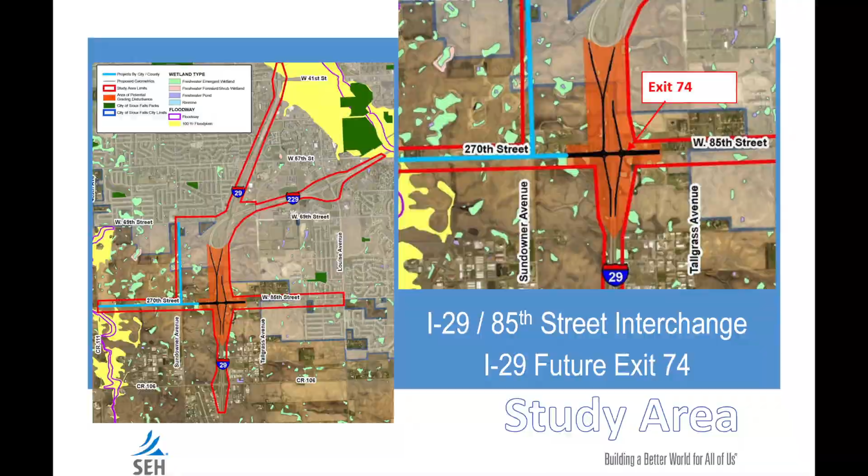So just a little bit of an overview here of where the project is. Some of you probably were here for meetings for the overpass at the same location, but the project limits are on I-29 from 41st Street on the north to County Road 106 on the south, and then along 229 it extends just east of the Western Avenue interchange. And then on 85th Street it extends from County Road 111, or the Tea Ellis Road, on the west, to Louise Avenue on the east. This information is also at some of the boards in the back, so I know you probably can't see some of this up here.

Here's kind of a timeline for the project. The overpass study started back in 2009. That was completed, and that was actually approved in March of last year. And so what we're working on is a study for an interchange at the same location. Once the overpass environmental study was approved, we submitted our justification report for a new interchange here to Federal Highway last year, and that was given a tentative approval in October, which allowed us to start on the environmental study for this project.

So once the environmental is complete and has approval, then we'll have approval for the interchange. So that's kind of where we're at today. We started work on the environmental study here in January of this year. And I'll let Ross jump in and talk a little bit about the environmental study.

Thanks, Al. We have 3 major pieces of our scope of services and work to perform on the project. I'll just briefly highlight what they include and what their current status is. The first 2 are survey and environmental studies. The survey work is largely complete. There's a lot of terminology on the slide that is a little bit technical, but the bottom line is we have to have all of the survey work completed before we can begin any kind of engineering design work. So we are very close to having the existing conditions base map completed. We expect that to be done very soon. All of that data then transfers to the engineers so they can start actually doing the design work.

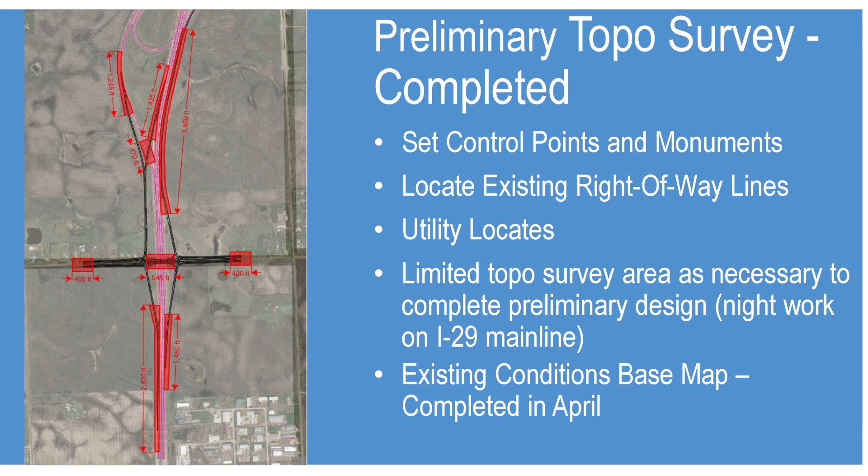What you're seeing in the background is what we call concept design. So functionally it works, it all makes sense, but you can't build anything from that. It's just to give you an idea of what it would look like before we take it to the next step.

So that's survey. For the environmental studies, the work in progress includes agency and tribal coordination. Agencies are federal and state agencies that have jurisdictional authority over things such as wetlands, threatened and endangered species, regulated materials, those types of things. What we do is we ask them, based on the study area, what's out there? Is there anything that we need to be aware of before we even get started? Because it does affect how we lay out alternatives. Same way with the tribes.

There may be tribal resources, so we need to know up front what's going on. So we're in the process of collecting all of that information back. We are also working on what we call special studies and field work right now. We got started on a few of these last fall before the weather turned, so we were able to get wetland delineation work done. And the rest of these are works in progress as we speak, especially the field work, which we really honestly haven't been able to get started until just recently.

So wetlands, regulated materials, we'll be doing another noise analysis of the area, and cultural resources. This is where we would look for architectural and archaeological historical resources that may need to be protected.

The third major task is preliminary engineering and design. What this entails is taking some of those conceptual drawings that were done previously, things that you see behind you, and making them actually into engineering drawings, engineering documents. The terminology we use includes horizontal alignment, vertical alignment, typical sections. Engineers basically will put a huge plan set together, and that's what will be a product of the work here.

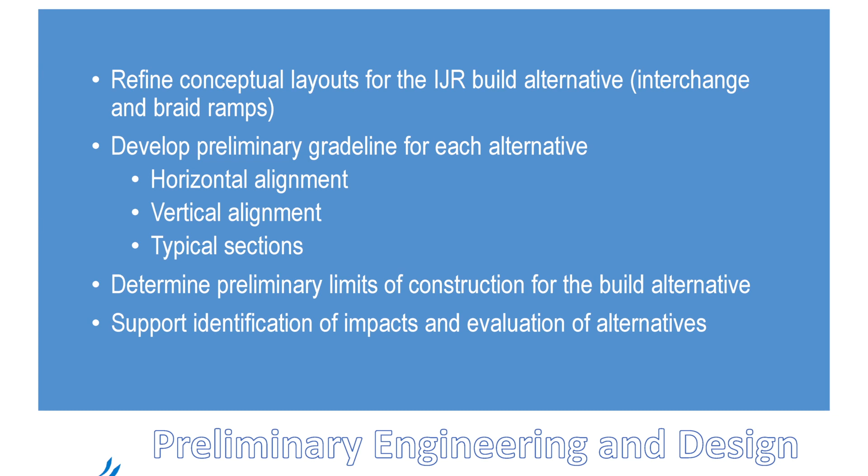So I mentioned input on the draft purpose and need statement. I wanted to spend just a minute to tell you why it's such an important thing in the NEPA documentation process. I've got just a couple of bullet points to read here, and these are not our words. These are from the Federal Highway Administration. We have representatives here representing Federal Highways, but these are the things that they are looking for as we put this together, and we'll talk in just a minute about what we came up with for purpose and need.

It validates the balance between the need for a project and social and natural environment impacts that might result. It establishes that this project is warranting consideration when you think about all of the other needs and all the other highway roadwork projects in South Dakota. It drives the process for alternatives consideration, in-depth analysis, and ultimate selection of the preferred alternative.

And there are several alternatives that will be considered for the project. And it is vital to meeting the requirements of other federal laws and executive orders protecting the natural and human environments. And we'll talk about that a little bit more too.

So this is what we have. We have three points for our purpose and need. This is very much a working draft. As a matter of fact, we were just tidying it up today, spending some time on it. But we'd love to hear from you, hear what you think about these points as we move forward.

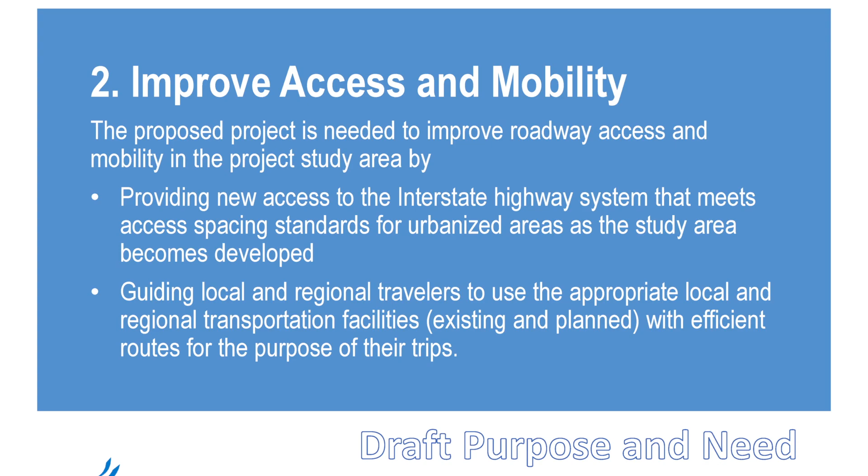Secondly, guiding local and regional travelers to use the appropriate local and regional transportation facilities, both presently and as planned, with efficient routing for the purpose of their trips. This is just a consideration of making trips that are efficient for travelers as they go through your growth areas.

And finally, the third point, meeting the transportation system demands, is our third evaluation point for the draft purpose and need of the project. The project is needed to provide a transportation solution that will be consistent with the Sioux Falls metro area MPO's long-range transportation plan by providing needed infrastructure to serve projected increases in traffic volumes in the study area and relieve expected future traffic congestion at other interchanges located within and near the study area.

And secondly, ensuring adequate levels of service are maintained through the regional highway network. In other words, can the project be implemented without increasing, or can it decrease, congestion at interchanges at I-29 and County Road 106, I-29 and 41st Street, or I-229 and Louise, for instance, under the projected traffic conditions?

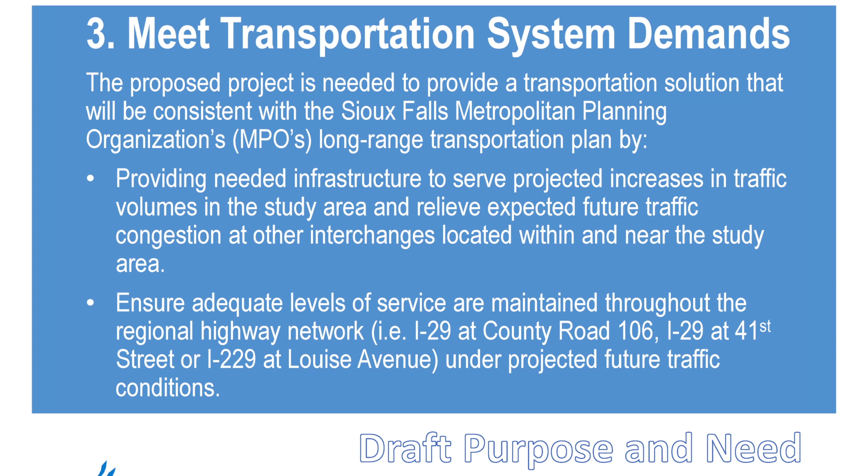So thank you for listening to all of that. We do have 3 project alternatives being evaluated in the environmental assessment, and I'll just briefly tell you what they are, and they are on the boards in the back.

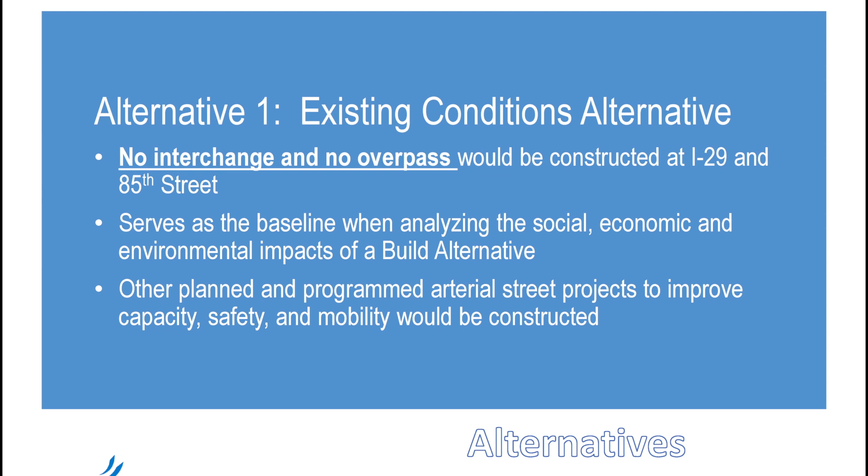Alternative 1 is the existing conditions alternative. This is a baseline type alternative that assumes no interchange and no overpass would be constructed at I-29 and 85th Street. It's a baseline. It's used for measuring. It's typically required by the Federal Highway Administration for that very reason. So you've got a base level of information to work from to judge impacts of other alternatives. However, it would include other planned and programmed arterial street projects to improve capacity, safety, and mobility in and near the study area. So that's alternative 1.

Alternative 2 is the no-build alternative. And this is a little bit tricky to understand because it does actually include something that's going to be built. The previously approved 85th Street Bridge overpass would be constructed. And it's over on the layout table over there if you haven't seen it before or haven't been part of those conversations when that project was reviewed and approved. However, no interchange would be constructed at I-29 and 85th Street. So no ramps, no access to I-29. But other planned and programmed arterial street projects to improve capacity, safety, and mobility would be constructed.

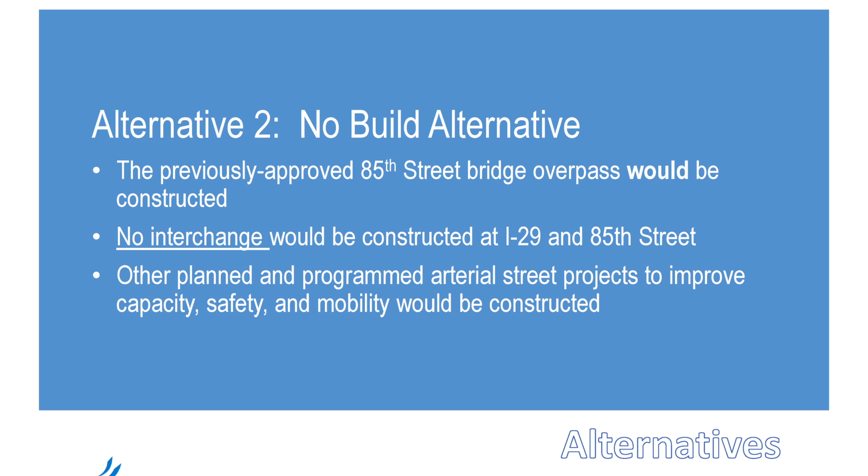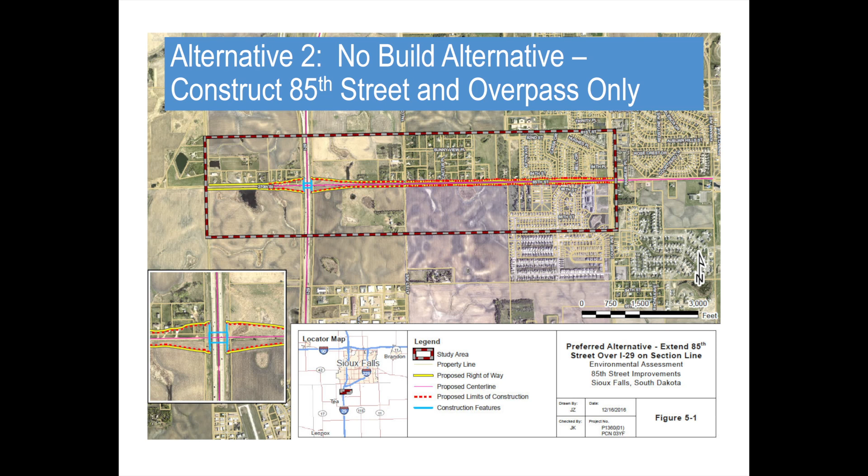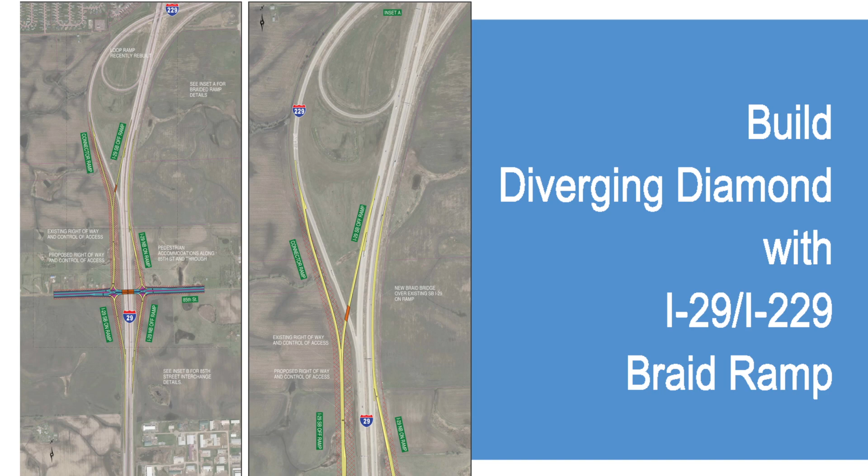So again, as a little bit of a refresher, this is what it would look like. Most of that project stays in place for the third alternative, which is the build alternative with the diverging diamond layout. This is the alternative that was recommended in the interchange justification report that was completed last fall, which has received tentative approval from Federal Highway Administration. And the reason it's tentative is we need to finish this part next for it to be completely approved and the rest of the environmental process to be approved along with it. It has the braided ramps on I-29 and 229 coming into the interchange. And I've got a little more detail on the interchange itself.

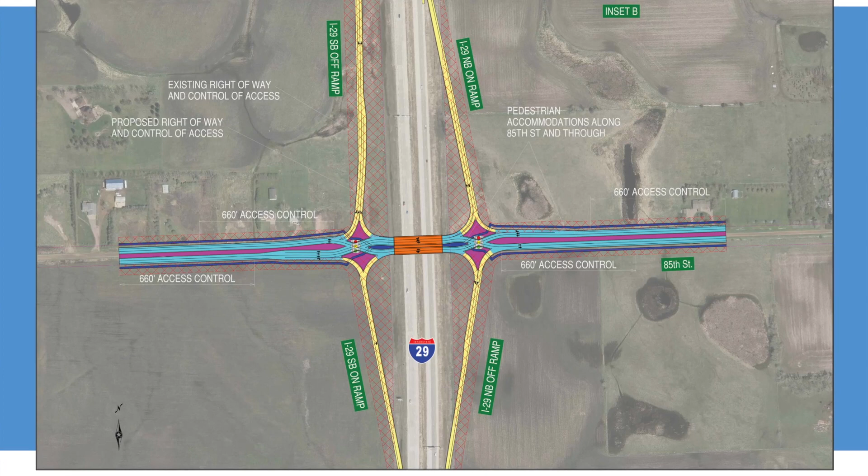Yeah, it takes a little bit to load there. That shows more detail of the alternative. And when we're all finished up here, I'd encourage you to take a look at the board in the back that has the same thing on it. We also have a short demonstration video of what a diverging diamond interchange not only looks like, but drives like, from an example that our firm worked on in the Twin Cities area that you can take a look at.

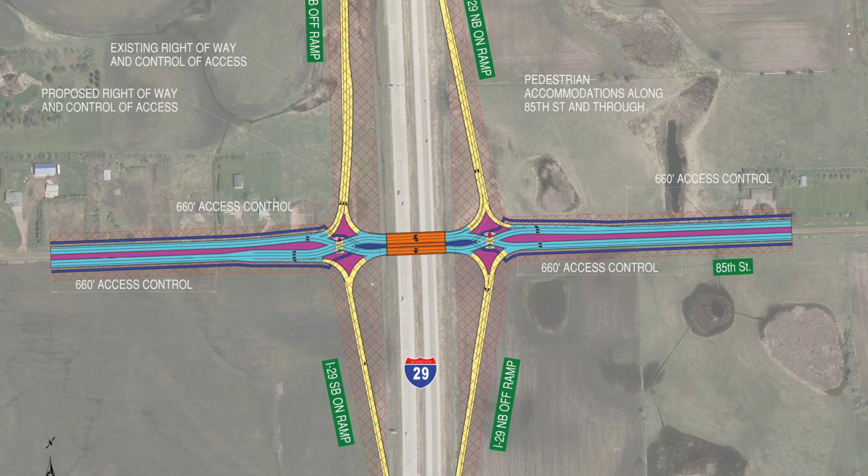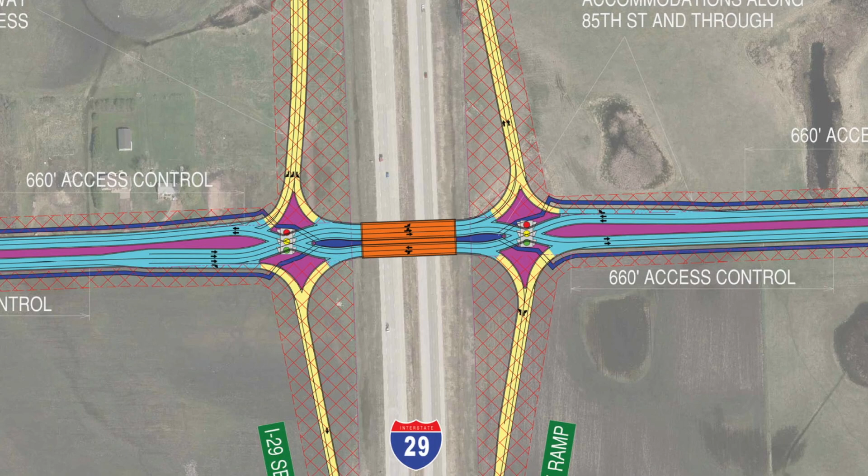But one of the things that we also wanted to make sure that everybody understood, we've had a lot of technical work done on the diverging diamond, but we actually haven't had an opportunity to tell you all about it in this type of a forum. There is a reason that this particular alternative was selected. There's a couple of key points that I wanted to make here. First of all, it greatly improves safety over other types of interchanges. It offers many fewer conflict points. Actually, there are 14 points of conflict for a diverging diamond interchange as opposed to 26 for a conventional interchange, a typical diamond interchange.

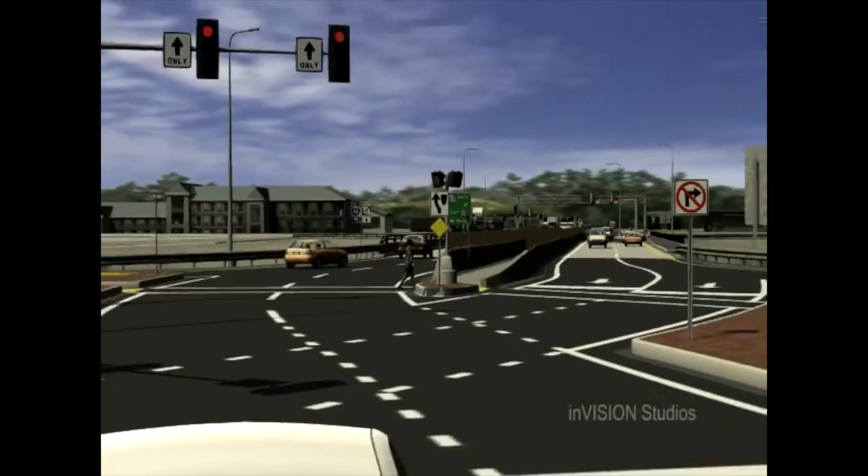They're spread out more within the design itself. So the safety factor comes in with the fewer number of conflict points. You would have fewer head-on, sideswipe, and rear-end crashes associated with that, with varying degrees of severity as well. It can calm traffic. It can, with the proper signing, not be confusing at all. And I think the video helps explain how it operates. And also, from a safety standpoint, pedestrian crossings are shorter. Therefore, they're much safer. They are lower cost. There's less right-of-way needed, typically. And less right-of-way on the environmental side of things typically would mean there'd be fewer environmental impacts.

Now, we're in the process of figuring out what they all are, but historically, it does enable a project to be constructed with fewer social and environmental impacts. There's also a board in the back that explains all of the things that I talked about, kind of how the whole interchange works, how you would drive through it. I think we're up. All right, thanks, Ross.